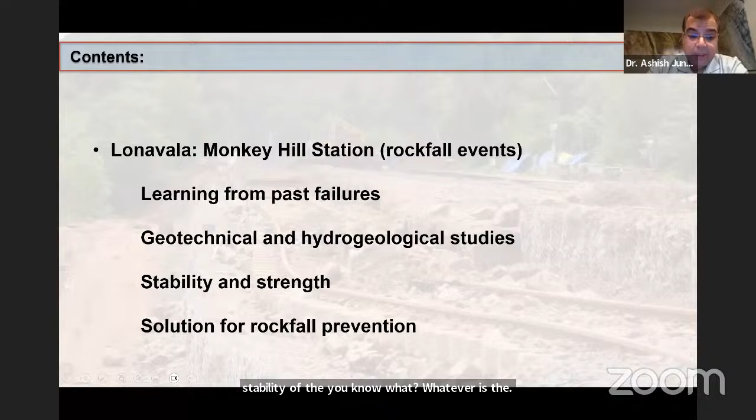And in fact, the best part is the solution was time tested a year after the installation, and this entire package was really, I would say, an eye opener for us. And thanks to Maccaferri, because they were the partners involved in the execution of the project. So I'll give you a brief background on this entire Lonavala section.

So it starts from Karjat. Karjat is a station not far from Mumbai. In the Karjat Lonavala section, this hilly terrain has, let me see if I can get a pointer. Yeah, I think this is better. It has several tunnels. In the entire 28 kilometers, you have 27 tunnels. So it's really a geotechnical challenge, this entire terrain of the Sahyadri range. The heights of these hills go right up to 600 meters.

One side of the section has steep cliffs and gorges on the other side. So it's really, as I said, a geotechnical challenge to have the entire railway line run through this terrain. This region receives 3,000 millimeters plus of rainfall each year. This is a large quantity compared to the short duration of monsoon months in the year. Just 3 months of monsoon and you have 3,000 millimeters of rainfall.

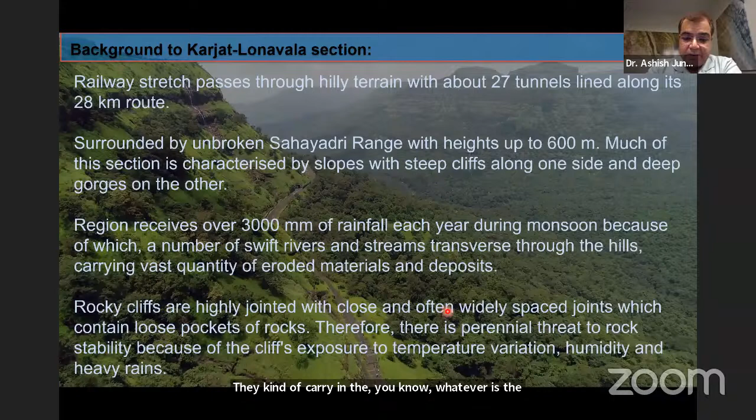It's a big chunk, because of which you have streams, rivers, and a large quantity of eroded material and deposits which pass through it. So a huge amount of erosion occurs. And these erosions carry away whatever is the jointed material between the rock cliffs, remove it, and degrade it. Because these joints are widely spaced and have loose pockets of rock, there is a perennial threat to rock stability when the cliffs get exposed to the wide variation in temperature, humidity, and rainfall.

So there is an extensive database maintained by the Central Railways from 2006 to 2017. As a first instance, all these rockfall events have been labeled or tabulated along this stretch. It's just about a kilometer plus long stretch, and we made it more like a pilot study. What you see over here, that's the hill. We call it Monkey Hill.

It's a Google map, so probably not so clear at this scale, but the station is somewhere there where you see the pointer. So you have these tracks coming from Karjat, Mumbai, and somewhere here the downline goes along this stretch, comes over here, and the upline comes along the other side and goes there. So that's the thing.

I'll run a short few second animation. It'll show you colored dots along this stretch. The size of the dots mimics the size of the landslide or rockfall event. Incidentally, landslide has a slightly different symbol, but let me see if you can catch these symbols as I run this video for the next 10 or 15 seconds. It has eerie music, just to show how dangerous this entire situation is. It starts from 2006 and goes each year. These events are larger each year. I think that's it, too short.

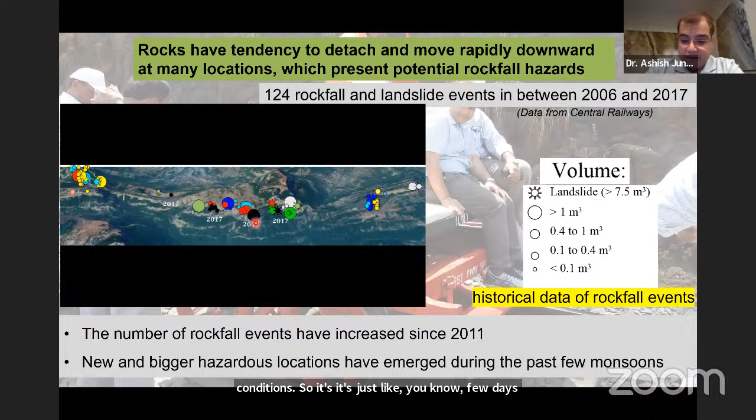But nonetheless, what you see is the number of rockfall events has increased. That's for sure, because people always worry about how extreme weather conditions cause this. Just a few days in a year is good enough to cause substantial damage. And it's also noticed that new and bigger hazardous locations have emerged in these past few monsoons.

And as an eye opener, in 2017, it was big news that boulders crashed through the engine of the Mumbai Hyderabad Express and pushed the train off the track. I think 3 bogies were off the track. The same year in August, a boulder punched through the Hubli LTT Express. Fortunately, in both these incidents, there was no casualty. But just a year later, again, boulders fell down on the tracks.

It's huge. These incidents made the railways take serious note, and they needed a more permanent solution rather than the routine examination they were having, wherein a person walks down the track every morning, sees if there's been any incident over the night, and reports to the nearest station. Something better was needed than a person each day reporting what is happening. That was the main objective, the main cause for the start of this entire exercise.

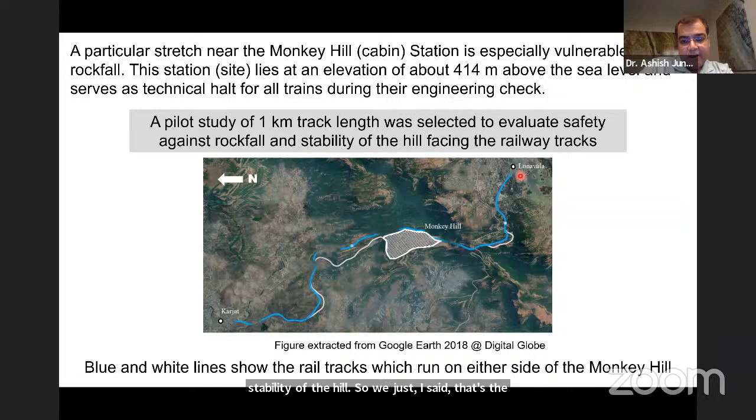So that's the line which goes right from Karjat towards Lonavala, and the white color is something which comes back.

They appear as individual spots. And at several locations you can find weathered and disintegrated basalt rock, which is mostly exposed, and it's the exposure over the decades which has caused this rock to disintegrate and weaken.

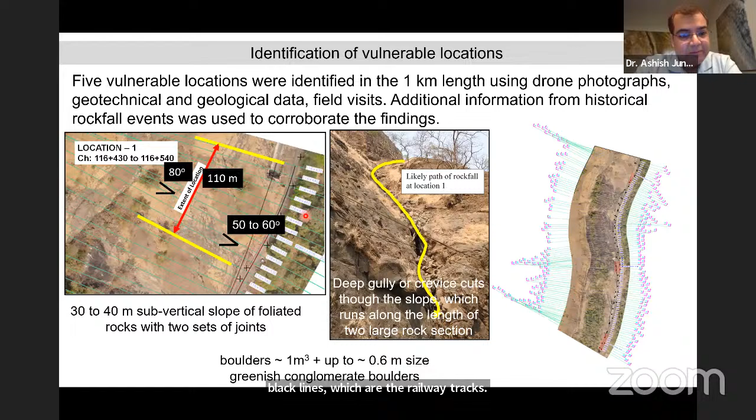I can go on, because this is location 4. Incidentally, location 4 is where the 2017 train accident happened, the Hubli LTT Express.

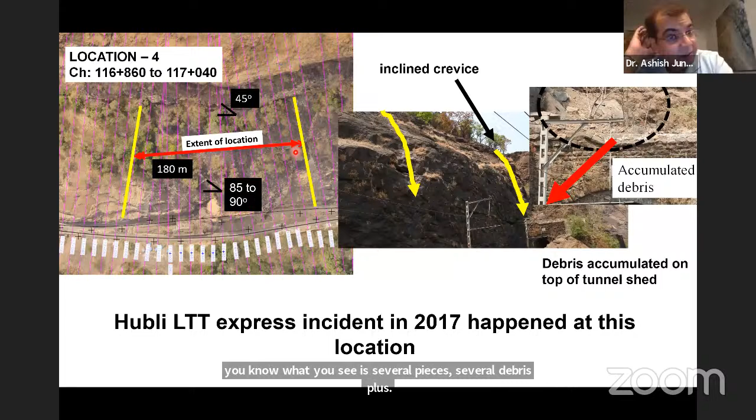I'll skip this, go to the next one. So with all these mitigation systems which are seen, it was more important to see which is the most effective mitigation method. We try to group them into 3.

The first one is prevention. Prevention is simple scaling, trimming of the weak pieces, remove them, and if necessary you do some shot blast of shotcrete, which can be supported by rock anchors.

The second one is a retention method. In retention method, you use mesh and netting, and support them with anchors. The third one is you protect your valuable infrastructure, or protect the system, using ditches, sheds, or even flexible barriers.

So what we needed for this site was a combination of two or more methods, and to see which combination really is more suitable.

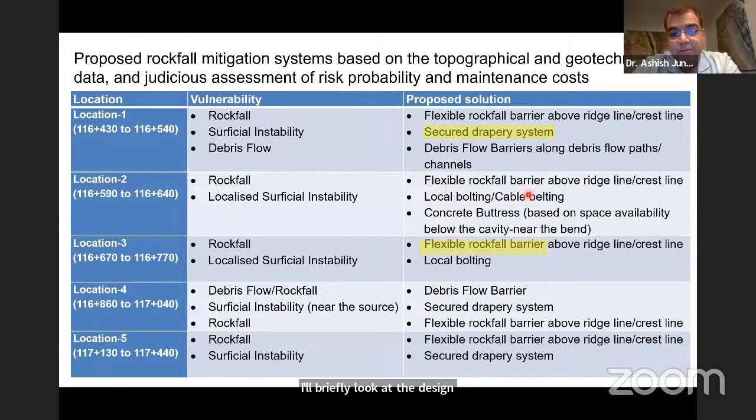There are other methods that were explored, especially gabion walls and concrete. Concrete was discarded because of its damage history, and gabion walls were not considered because of the large space required. So earth embankment and gabions were discounted.

There's another method where you use shotcrete. The examples we saw showed most of the shotcrete did not have enough reinforcement, but it's well documented - at least most of the literature, site visits, and experience we've seen shows shotcrete works poorly when exposed to weather along our Maharashtrian region, west coast. So durability is an issue, and you can see separation of shotcrete from the wall or rock face you want to protect.

So the idea of protecting the face against extreme weather dies off if such a separation starts. So we needed something where the maintenance is minimum.

So the draped or mesh system has a design. I won't go through the design details in this slide because I don't want to lose the audience's interest, but I'll highlight some important inputs necessary for the design. I'll just go to the next slide which shows the input.

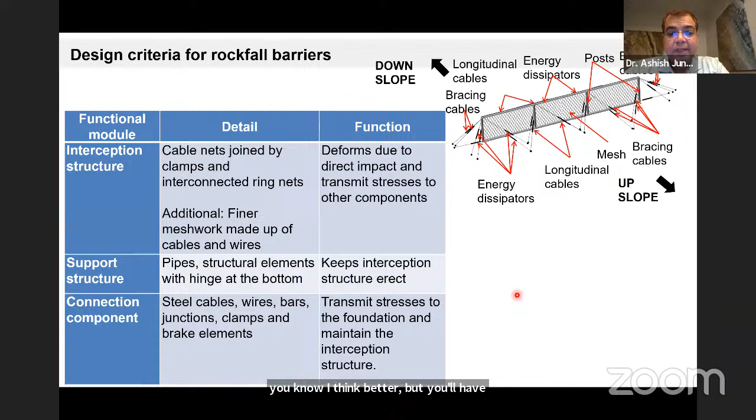Why is it better? Because it's based on a well-established, internationally recognized European standard, ETAG 27, its design specification, which is based on a lot of experimental data and back analysis. It's a well-established system, I would say. Most of the design is carried out either against the serviceability load or the ultimate load.

If you design against the ultimate load, after maybe a few crashes, you need a complete replacement of your barrier system. Serviceability would mean the safety factor against the impact load is 3 or 4 times the energy really demanded by the falling rock debris.

And these barriers range right up to 8,000 kilojoules. Let me tell you, 8,000 kilojoules is a massive, huge number. Even a few thousand kilojoules will dwarf you if you're standing next to it.

We also wanted the barrier system, because of its flexibility, to elongate when debris falls on it - it's designed to elongate so that the energy gets dissipated. And post-elongation, there should be substantial distance or gap between the railway and the barrier.

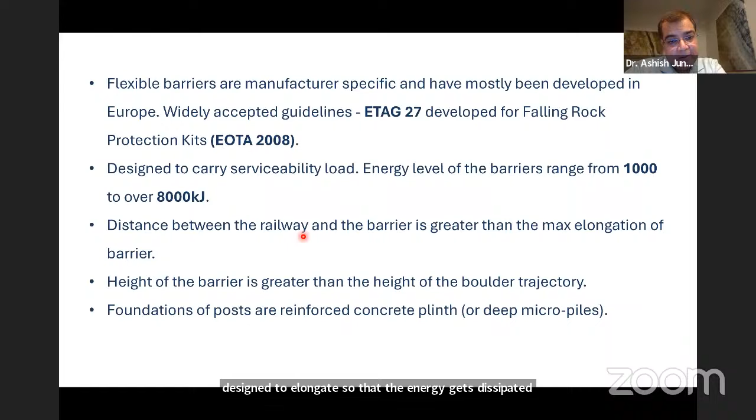Its design is quite simple, I'd say school level physics, where you have the total kinetic energy of the falling block due to linear velocity and angular velocity. You want to design this system so that the entire energy gets transmitted to the foundation and is dissipated in the ground.

There's a very nice computer program - I really appreciate it, though it's a commercial program. We've tried it against a standard DEM model where you allow a block to fall, but I think nothing compares to it. I really appreciate the team behind developing it.

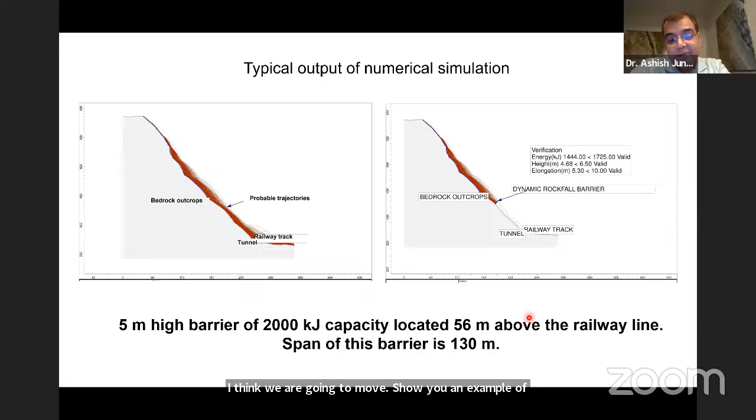So just one particular case, because I think we are going to show you an example of this 2000 kilojoule capacity. That's for one particular span or design. It was done, and it was very much in the news after that. Although it was tested, the engineers who made a lot of effort in getting this thing done needed a proof, I would say, with the limited budget given at that time.

So a small, I would say, pilot of the pilot study was funded, of about 6 crore rupees, to fund one particular section. And when you go back and see that out of those 5 sections, choosing the one extreme one and putting all your gamble money on that was really a challenge. And we also had experts going in.

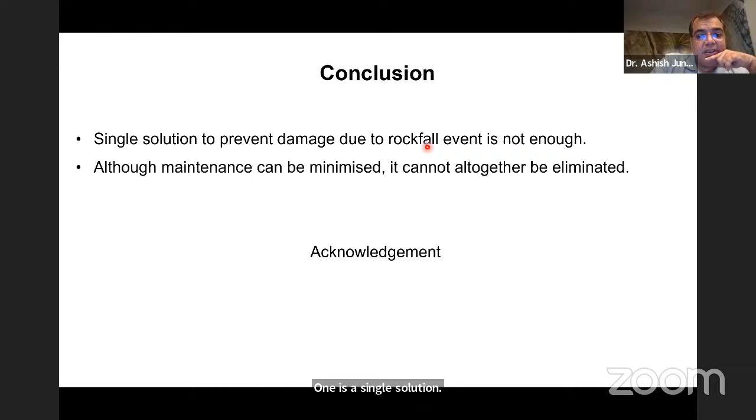So I'll just conclude with two statements. One, a single solution may not be sufficient to prevent the debris from damaging your infrastructure. And maintenance can be minimized, but it cannot be altogether eliminated.

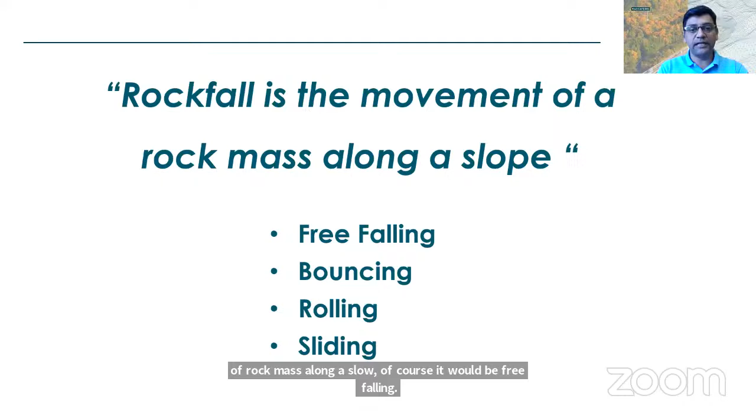Of course, first, what's this rockfall? Rockfall is a movement of rock mass along a slope. Of course, it could be free falling, bouncing, rolling, or sliding. I want to just show you some videos from YouTube which I collected so that you get a feel of a rockfall while watching this webinar.

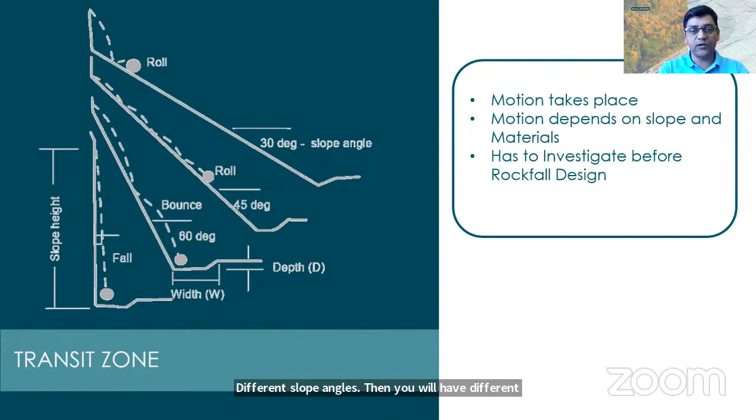And usually the detachment, when it happens, let's say from a vertical cliff, is going to be a simple free fall. But if it is on different slope angles, then you will have different motions, which could be a rolling motion, sliding motion, or bouncing. Of course, the animations I'm showing are exaggerations, but typically these are the motions.

Of course, why we need to understand this is in order to intercept these falling rocks, you will need to understand the mechanism, how it happens, and what the different possibilities are. At the bottom of the hill, you will have an area, the runout zone, where a large volume of rocks can be accumulated.

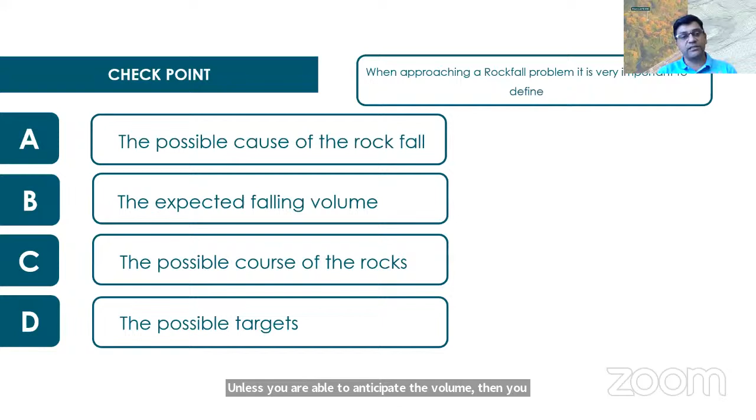Usually, when we approach rockfall mitigation or protection, we'll need to understand what the possible cause is, then what the volume is, because unless you are able to anticipate the volume, you will not be able to design the solution. Of course, it is going to be a probabilistic analysis where you are going to estimate and then design for it.

What's the possible course of the rocks coming from the hill, and which are your targets, whether, like Professor presented, it is a railway track, a road, a hydropower project, or a building. Depending on the type of target and the kind of risks we are anticipating, the solution will be chosen accordingly. Of course, there are various kinds of solutions.

This is a big list, but let's say you have protection measures, retention measures, and prevention measures, and I will take you through these measures one by one. One of the simplest and safest options, the first, is scaling, where you can just remove the boulders or debris and make the slope free of possible rockfalls.

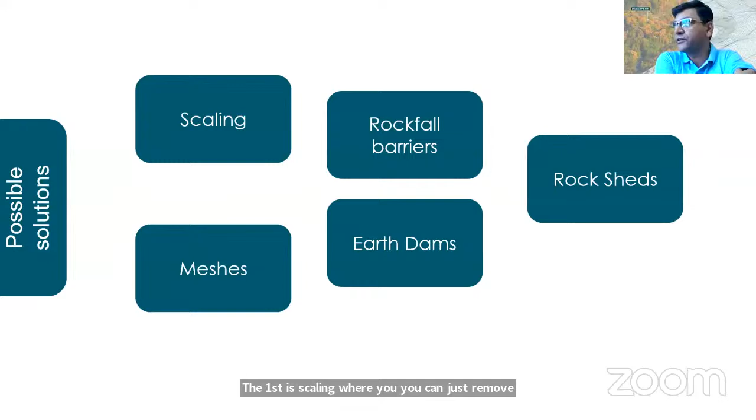However, there is a limitation to it. What's the volume of these loose rocks available, what's the height, whether you are able to reach it, and what property or infrastructure is at the toe of the hill, whether we will be able to hold this loose scaling. The most simple one is berms and benching.

So you can have, let's say, a slope and you can create benches. It's a very popular technique which is being adopted. Here you will need a lot of space, because if you have space, then you can have these berms or benching. What exactly will happen is, with these benches, the amount of energy the rock brings along with it will be reduced.

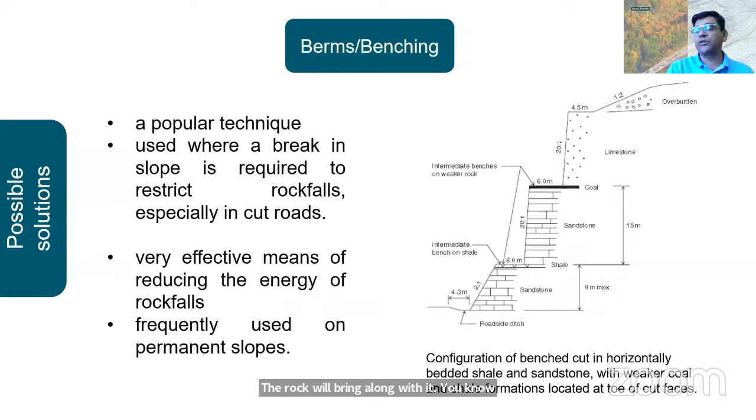And of course, the protection you are going to provide can be accordingly designed. Very simple: higher the energy, higher the cost of the solution. The most commonly adopted solution is the earth embankment, a very cheap one. However, the limitation is the space, like Professor mentioned. In the previous case, the earthen embankments were ruled out because there was no space available.

But if you have space available, then you can definitely go for solutions like the earthen embankments, which can be built with simple earth or maybe a reinforced soil solution. So, like reinforced soil or retaining walls, or let's say the embankment. You can have rigid solutions also, like the concrete barriers the professor presented as examples adopted in the central railway area, where you have seen the kind of damage it can make.

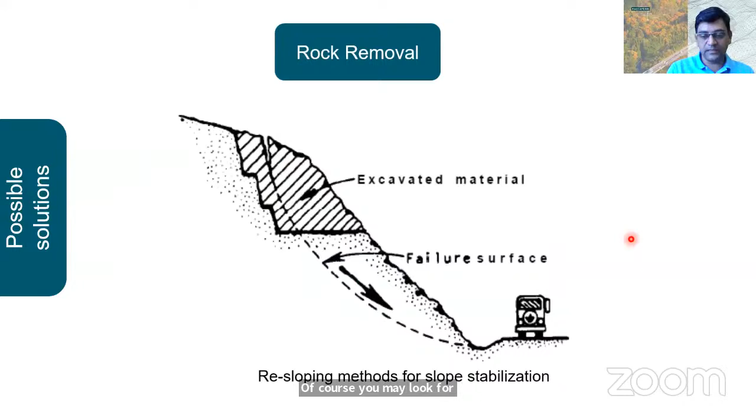You can have masonry walls or timber soldier pile walls. Of course, you may look for reprofiling or resloping if you have possibilities of flattening the slopes. Loose scaling, of course: you have the infrastructure to be protected and there are loose rocks, so maybe stopping the traffic if it is a railway or road, or providing a temporary protection measure, and intentionally bringing the loose rocks or debris down, which shall not cause the rockfall later on, an intentional rockfall.

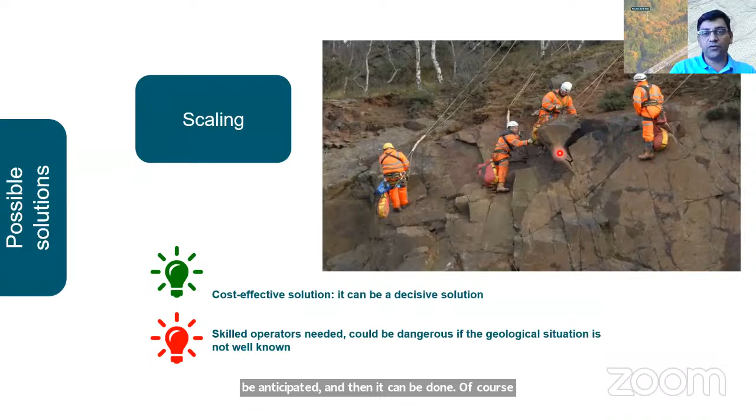Of course, this is a very cost-effective solution for immediate threats to be removed. However, this is not a guarantee that the rockfall will not happen. So we will need some protection measures, but this is one step. Here, of course, it could be a dangerous situation if the geology or the site is not properly studied.

The second solution is meshes, typically steel wire meshes. The steel wire meshes will prevent the rocks from coming down, or they can be contained in a certain area. Of course, in this case, the area to be covered by meshes will govern the cost of it. If it's a very big area, it will be a very high cost. And looking at the site locations, accordingly, the solution can be chosen.

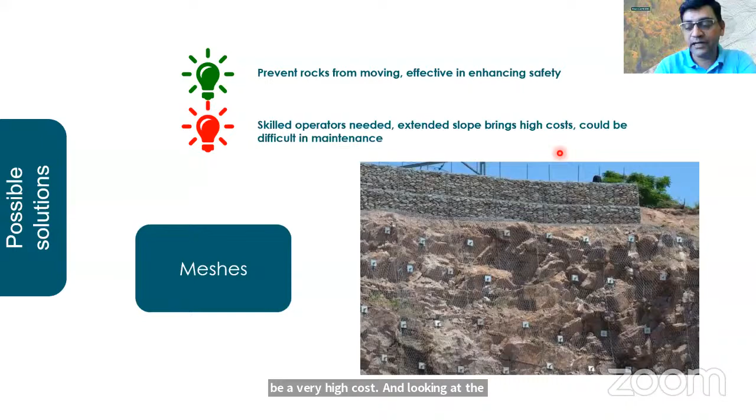Another solution is rockfall barriers, sometimes referred to as dynamic rockfall barriers, which can be installed on a slope. They are relatively easy to install, and could even be economical solutions in case the surface area to be protected with meshes would be higher.

However, please keep in mind, any rockfall solution is not going to be maintenance free. This is very important. Many times as civil engineers, we design certain structures which are maintenance free. However, rockfall solutions require routine maintenance, which will depend on the kind of material that is coming down.

Of course, the limitation with these barriers could be the energy levels. If the energies are higher than the available rockfall barriers can take, then you will have to go for a different solution. For very high energies, you can go for the earthen embankments, either a conventional simple earth embankment or a reinforced soil structure. The advantage is it can take very high energies. The disadvantage is it requires a lot of space, but this is a very, very cost-effective solution.

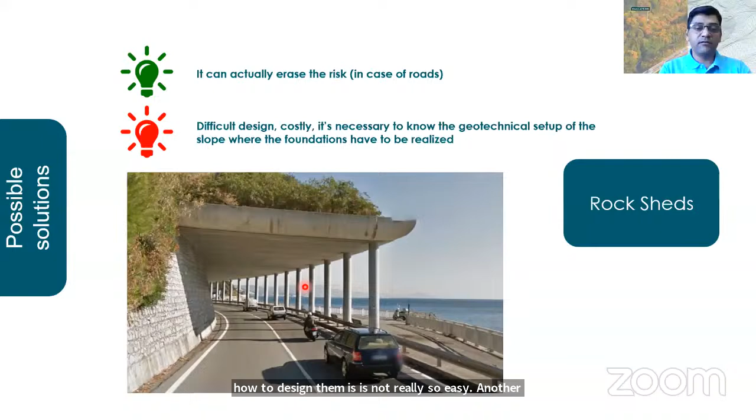How to design them is not really so easy. Another challenge is if it is going to be constructed in hilly areas. Of course, the placement of the foundation of such a structure is going to be a challenging one. If such a situation is there, then you will require a very, very huge cost to build this kind of rigid structure.

Or you can build a ditch or trench in case you have space. You construct a big trench where the accumulated debris can be collected. Again, this is a very good solution, however, subject to space availability.

Sometimes you may use shotcrete, like you place a mesh on the rock slope and put shotcrete. However, one of the limitations of shotcrete, like the Professor presented in the case, is that the mesh gets separated from the rock. Sometimes in these hills you have a lot of subsurface flow, and with this shotcrete you just stop the complete movement of the subsurface flow, which leads to pore water pressure generation and possible failures.

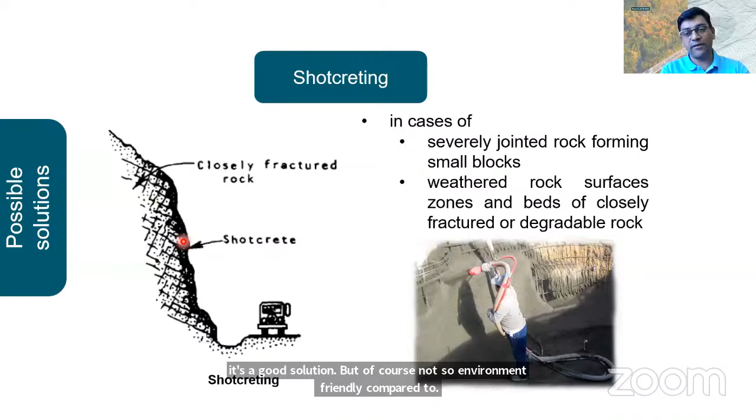Of course, it's a good solution, but not so environment friendly if we want to compare, let's say, carbon footprint. However, this is one of the good solutions to be adopted with certain cautions.

A very important part is drainage. Many a time it has been observed that rockfalls are noticed in the monsoon areas. That's related to very highly fractured, jointed rocks, from where the water seeps in. You have very fine material accumulated there because of weathering, and it creates a nice smooth surface where the rocks can just slip on, and then you have the possibility of rockfall.

So drainage is very important, which can typically be built by drilling holes, and through those holes you can put perforated pipes. And many times I get a question, are you really sure it's going to work? Just to show you, this is one of the projects on the Mumbai-Pune Expressway near Adoshi Tunnel. These are the pipes drilled in the hill, and you can see the amount of water it drains off during the monsoons, and around the year a lot of water comes from there.

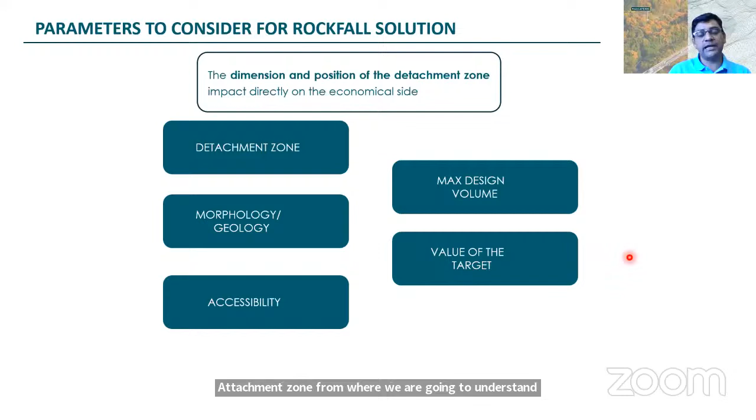Of course, when we design the rockfall solution, we need to understand the detachment zone, what the dimension and position of this detachment zone is. This directly impacts the economy of the solution. Second is the morphology and geology, how it's going to influence, and basically the type of work we want to use will be governed by this.

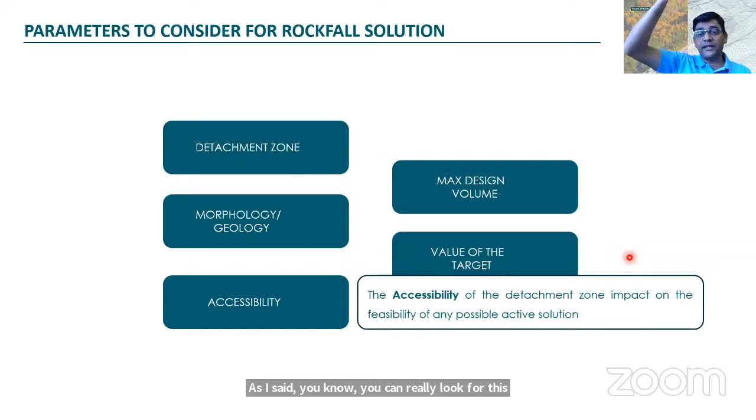A very, very important part is accessibility. As I said, you can look for the scaling operation, but if the hills are very high, like typically in the Himalayas, or even other areas where you have inaccessible tops, then you cannot do anything. If that's the case, then you will have to see the feasibility of any solution to be provided there to hold the rocks.

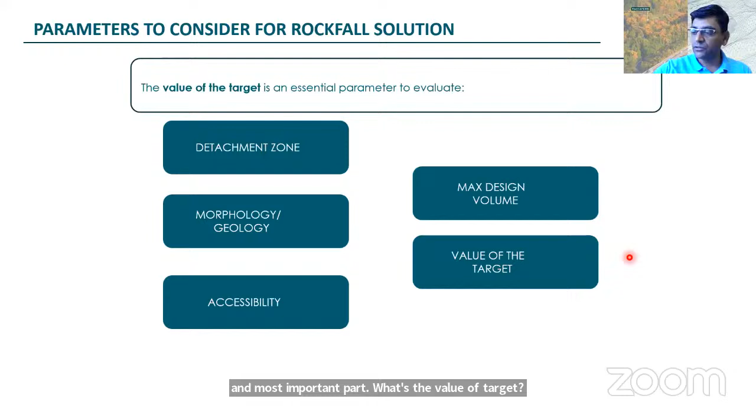The volume, as I said, will govern the kind of solution you want to choose, whether embankments, barriers, or meshes. And of course, the economy also will be governed by that. And most important, what's the value of the target you want to protect. Accordingly, you will have to take care of the solution.

Now, when we look at these rockfall protection works, the simplest one is you put a mesh. The mesh could be simple double twisted mesh or double twisted mesh reinforced with steel wire ropes, depending on the situation. But the most preferred one is the double twisted wire mesh, that is the hexagonal wire mesh with the wire ropes.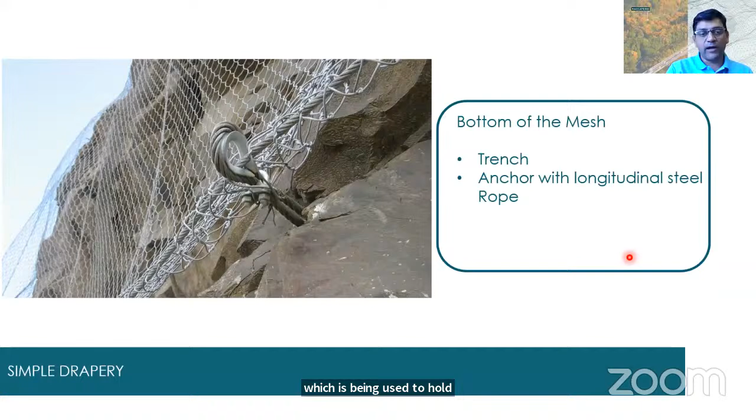What you need to understand is we are going to put a mesh facing with the longitudinal ropes on the top, and the mesh will be anchored at the top so that the rocks come down, and then at the bottom of the hill you can have a trench, or steel wire ropes used to hold anchors, and an additional wire rope at the bottom which can help to accumulate the debris.

Let's look at an animation. Of course, this is an exaggeration. The mesh cannot be just in air; what you see in the sketch, it will actually be hugging the surface. But just to give an idea, if you have a rock slope with the mesh and you have a detachment, it will come down with the mesh.

The falling rocks will be guided at the toe, either with the trench at the toe or with an anchor at the toe, and you will have accumulation of the debris. So accordingly, the debris system is to be designed, which will be dependent on the volume of material to be retained at the bottom and the kind of mass it's going to be.

Another option, typically we refer to it as a secured drapery. Secured drapery is nothing but where you put a number of anchors, could be soil anchors or rock anchors. Here, of course, you have a mesh followed by a number of anchors all along the slope, and then of course the cables, nets, or ropes which are being placed.

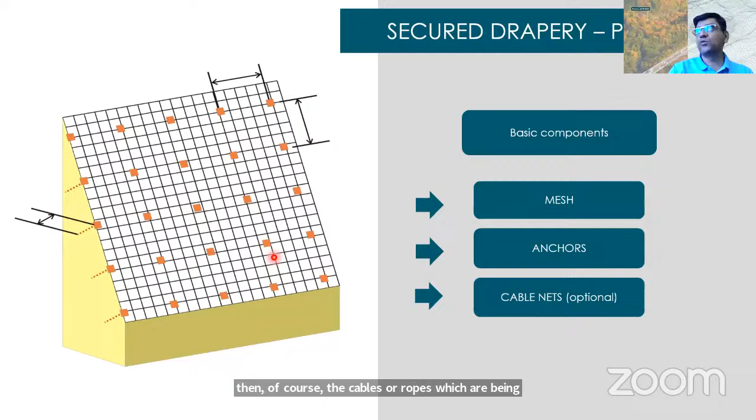So the idea is to possibly avoid the detachment of the rock mass from the slope, and the detached rock mass, if it is there, gets retained in the mesh itself. So the mesh will be designed for a volume of the expected or anticipated or assumed rock mass between the rock nails.

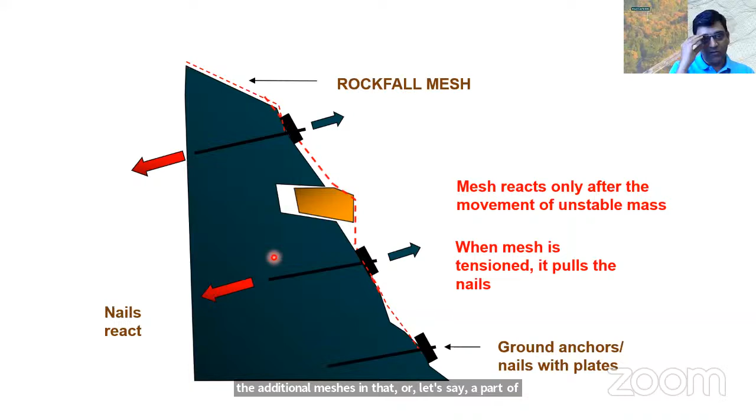Here you will have to understand the behavior of the mesh, how exactly the mesh will behave, especially when you have such situations of rock mass movement or accumulation of debris at top, so that you understand how much punch force, because it's a punching kind of force, it can take, and how much could be the deformation.

Obviously, when you have the drapery mesh installed on a slope, looking at simple drapery or secure drapery, you will need to understand the tensile strength of the mesh, which can be tested as per the various ISO norms. I don't have to go into the details of this, but that's how exactly you will characterize it.

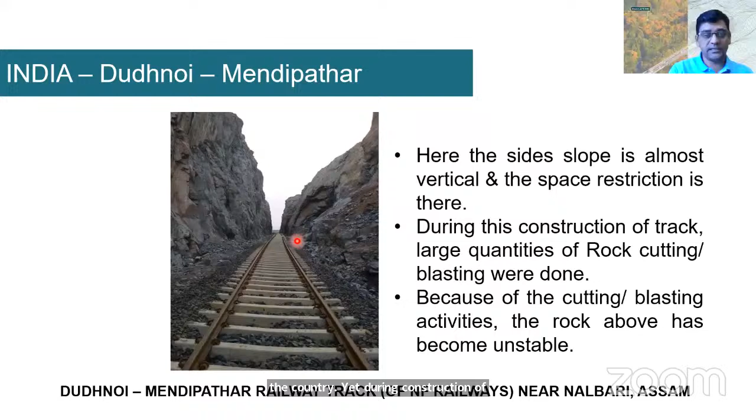Just to give an idea, let's say on one side we are looking at vertical cuts for a railway project. That's from the northeast part of the country. Here, during construction, large quantities of rock were cut where blasting was done. Of course, there is a lot of fragmented rock on the surface, which poses a threat to the safety of a running railway line. This is a railway station, and it's happening close by here.

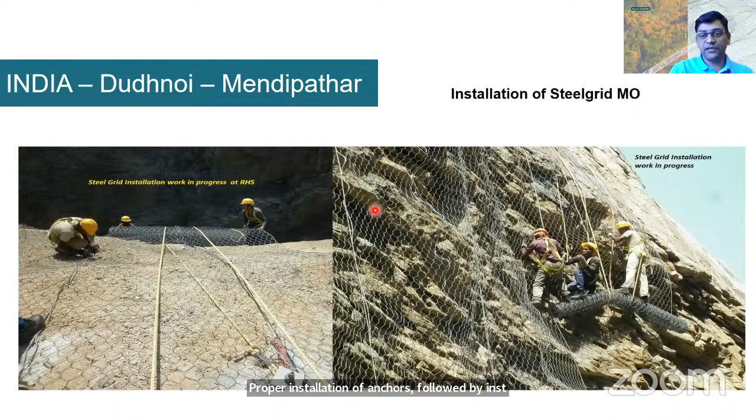So here the solution was placement of a mesh and the nails, what we just saw as a secure drapery system. Here the first step is you have the anchors at the top. The anchor design will be governed by the type of rock available there, and then you do the proper installation of anchors followed by installation of the drapery system. Of course, while doing so, proper care and safety has to be taken.

According to the rock size and estimated volume, you choose the different types of mesh. It can be a simple hexagonal wire mesh, or you can have steel wire rope panels, typically what we refer to as HEA panels, high energy absorption panels, or you may have steel wire mesh reinforced with the panels, which we call a MAC armor system.

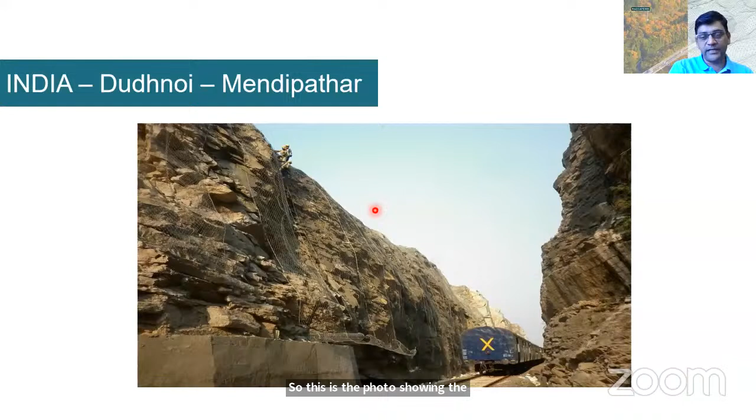So this is the photograph showing the construction of the protection while the railway line is operational. So these solutions are very, very flexible, not just from the deformation point of view, but even from the installation point of view. Depending on the project requirement, you can continue the operations also. So this is the high energy absorption panels.

Another solution is typically barriers. The function of a barrier is to stop the motion of the boulder, catch it. Sometimes it is referred to as a catch fence. Some people refer to it as a dynamic rockfall barrier, where you anticipate an infrastructure, could be a railway, a house, or a road, and a falling rock coming from the slope which could hit the infrastructure and cause damage.

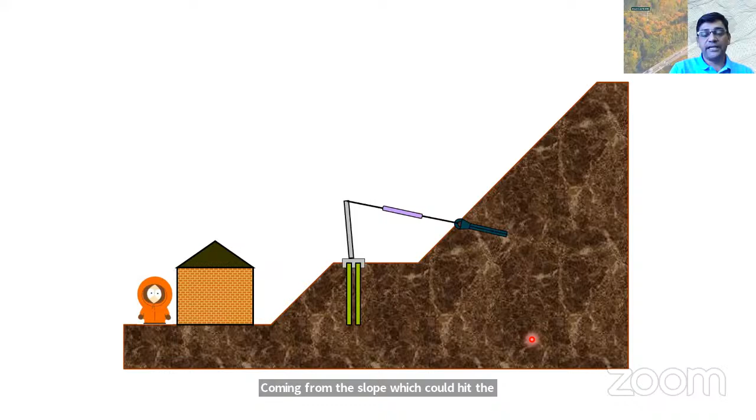So you install the barrier with, first of course, the foundation, followed by the posts, upslope anchors, and then the interception mesh. And if there is a rockfall, then the falling rock is caught by the barrier.

Usually, when you design these rockfall barriers, you need to take care of energy, but a very important part is also the amount of deformation you expect and how far the infrastructure is from there. If it is very close, let's say you have a road or railway very close here, you will have to minimize the deformations. So the design of the barrier will require information on the deformation of the barrier. And as the Professor mentioned in the previous presentation, these barriers are tested as per certain guidelines, the European guidelines.

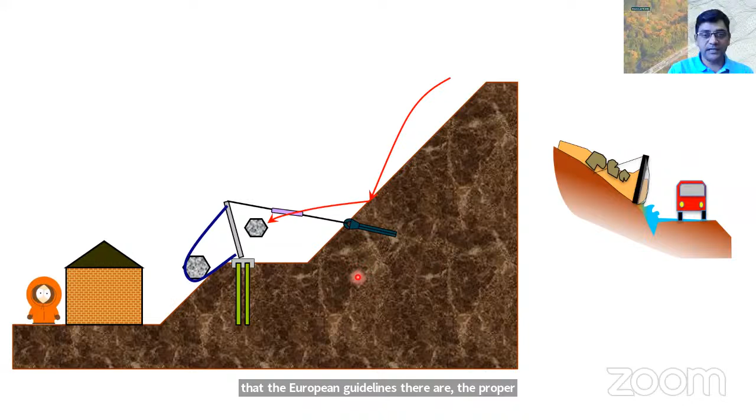There are proper tests to be carried out, where this whole system is referred to as one system: foundation, post, rope, upslope rope, the brakes, and the mesh. That's what is typically referred to as the EAD, European Assessment Document, which gives the information of these barriers.

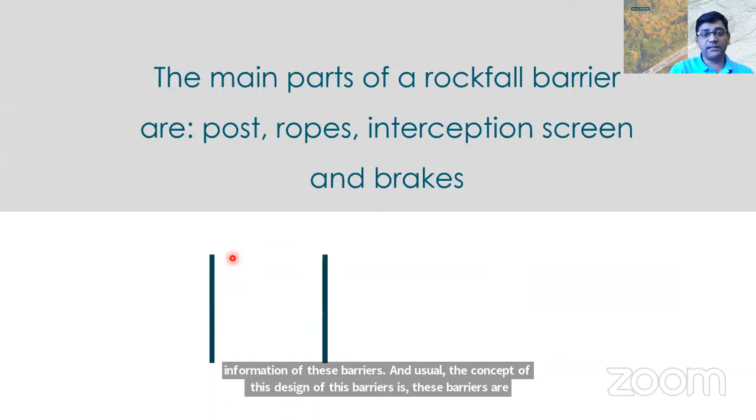Usually the concept of design of these barriers is that they are designed for multiple impacts. What are the main parts of these barriers? First, of course, nothing but the post. Posts are the vertical steel members which are installed, followed by the ropes, which are usually the side ropes, the top rope, upslope anchors, bottom ropes, and then the interception mesh, followed by the brakes. So this is a typical sketch.

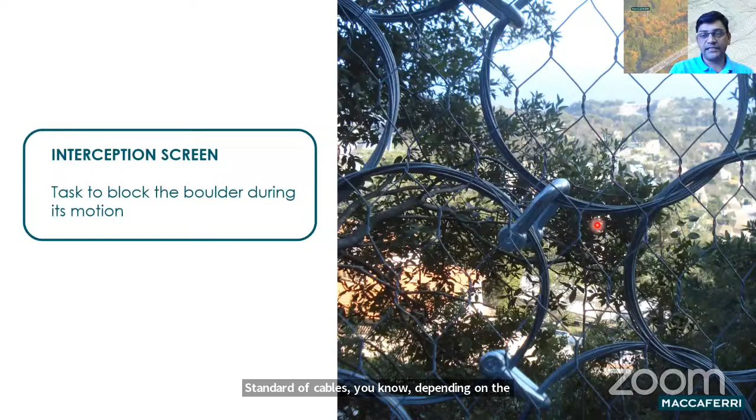There are possibilities of various types of interception mesh, like rings. You can have the double twisted hexagonal wire mesh, or you can have the steel rope cables. Depending on the energy, different types of screens or meshes are used. And then the brakes, like the omega shape brakes.

The title of this webinar is Advanced Flexible Solutions for Rockfall Protection Works. If you have very rigid barriers, they usually get damaged, they cannot absorb the energy. Whereas these are dynamic flexible barriers. The function of the brakes is basically to control the loads on the barrier as well as on the foundation, which optimizes the overall solution.

For designing this kind of barrier, you need to understand the kinetic energy, which is half m v squared - that's simple physics. When you design rockfall barriers, kinetic energy is the accepted approach for designing them. You will also have to design the barriers considering the deformations for the designated dissipation energy. The performance of the brakes is very, very important. Each and every element of the barrier performs a certain function, and the whole barrier needs to be considered as one package.

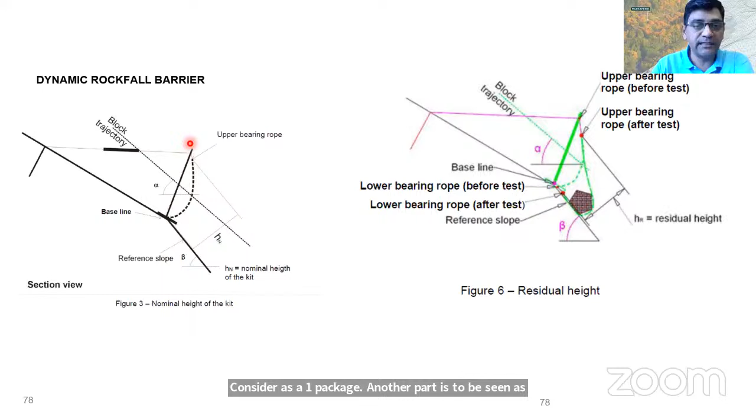Another part to be considered is the residual height. What it means is you design the barrier for a certain height, but after the first impact, there will be a reduction in the height of the barrier. The remaining height is referred to as the residual height. You take a ratio of this residual height to the original height, and based on that you classify the barrier into different classification classes, A, B, C.

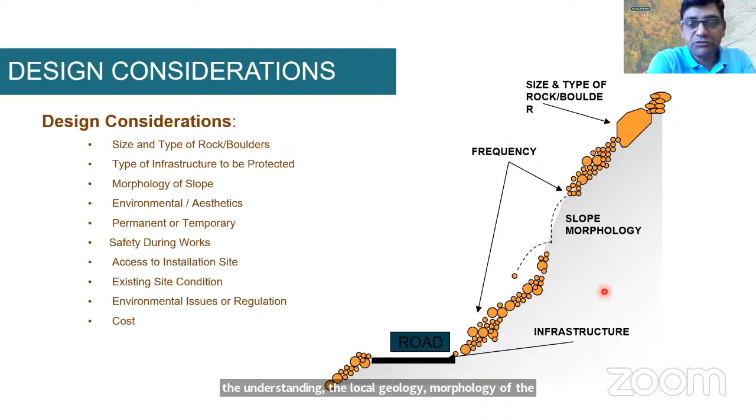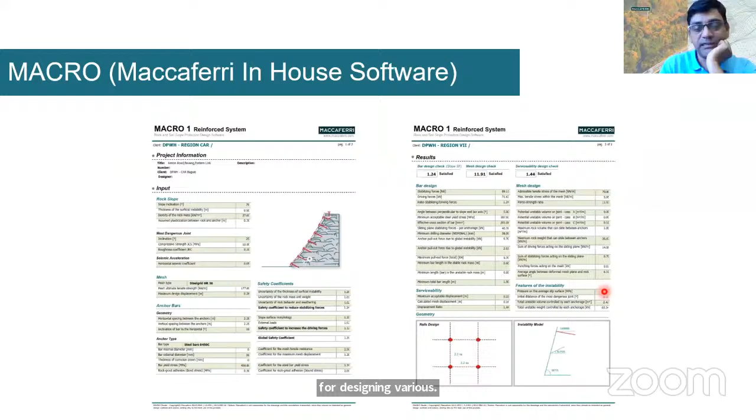For designing this kind of structure, you will need to design the anchors or nails. For that, you can use commercially available software like Slide. We also have our own software, Macro 1 and Macro 2, for designing various systems like simple drapery systems and secure drapery. For design of the rockfall barrier, you need a simulation of the rockfall, which is usually done by the Rocscience software, RocFall. With a combination of various software, you can design the overall solution.

Now, I would just quickly glance through some case histories so that you get a feel of whatever we have talked about.

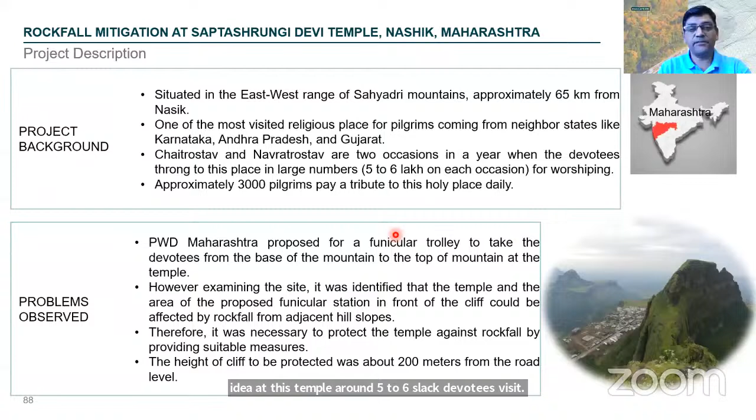The challenge was the extent of area to be protected was very big. The heights were very high, around 200 to 250 meters from the accessible location. During monsoon there are clouds, so visibility is a challenge. There were vertical cliffs, and the hill itself was inaccessible. So for the first time in India, helicopters were employed for transportation of material. The site was such that even regular civil construction workers could not work here, so specialized climbers were engaged.

The solution was a secure drapery system of high energy absorption panels made of steel wire ropes. A dynamic rockfall barrier of 5,000 kilojoule capacity was installed, around 7 meters high, protecting around 150 meters of length.

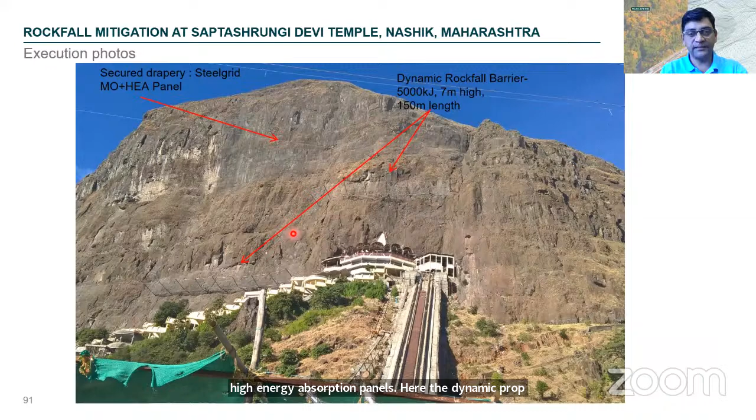The success part is that after installation of this solution in December 2015, a rockfall event was reported on the slope above the temple in June 2017, which is typically a monsoon month there. The dynamic rockfall barrier captured these rocks, which were weighing around 300 kg. When this event happened, there were devotees just below these barriers, and the rockfall barrier saved this precious human life. So that's the success of this rockfall solution implementation.

Another solution is from the Mumbai area, Gilbert Hill. Gilbert Hill is a very interesting site, unique in India, where columns of hexagonal cross section of basaltic lava are noticed, formed around 65 million years ago. This is a grade 2 type heritage structure declared by the Municipal Corporation of Greater Mumbai in 2007.

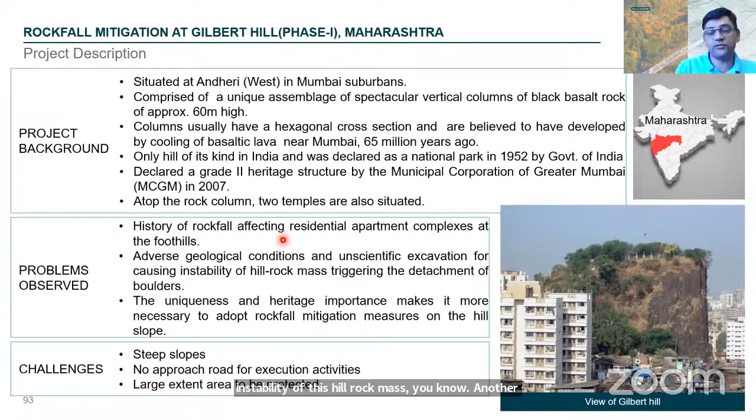This area had a history of rockfall, and there are residential complexes nearby. Because of adverse geological conditions, it was required to provide a solution. There were some unscientific excavations which led to instability of the hill rock mass. Another challenge was the steep slopes, no approach road to the execution activities, and large extents of area to be protected. Considering these space restrictions, a secured drapery system was installed with HEA panels and steel grid, along with subsurface drainage to avoid seepage issues that could lead to huge failures in future.

The next case history is from the Mumbai-Pune Expressway, Bhor Ghat section. This is part of the Western Ghats, Sahyadri Mountains. Here a tunnel is being built, and near the tunnel there have been incidences reported of rockfall and landslide, with possibilities of damage to infrastructure. So here the solution was provided with rockfall barriers of different capacities, like 2000 kilojoule to 5000 kilojoule.

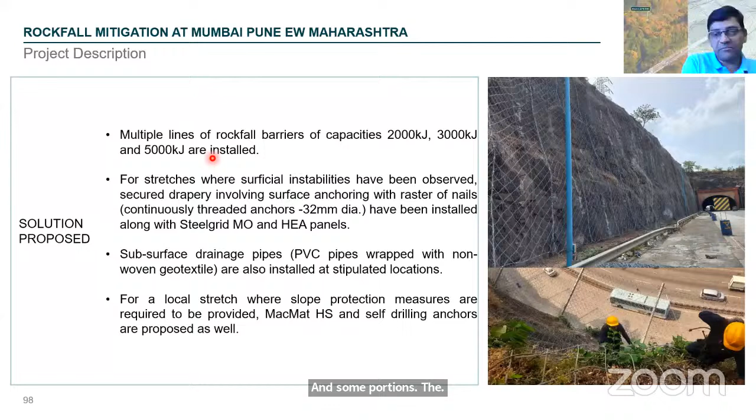Nails were installed of 32 mm diameter. Subsurface drainage, which is a very important part, was installed using PVC pipe wrapped in non-woven geotextile. In some portions where slope protection was required with vegetation, high strength mesh with synthetic mats were installed.

These are the execution photos of protection of the slope with barriers installed on top. This is another view, another location where the barriers are installed. So if you travel from Pune to Mumbai, you will notice this solution implemented.

Moving from Maharashtra to the Himalayas, this is a project from Uttarakhand, for a hydroelectric power station, Dhauliganga. Here the issue was basically fractured, weathered rock with vegetation on the slope.

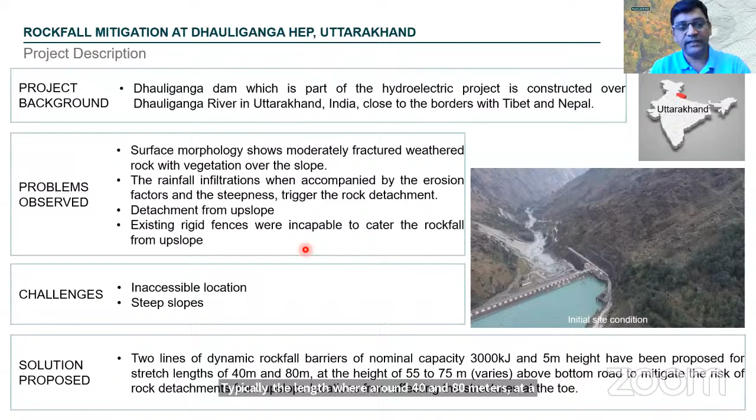Due to the possible accumulation of debris as well as the steepness, combined with rainfall, anticipated detachments of the rock mass in the uphill slope were anticipated. Here, as usual, inaccessible location was the challenge along with steep slope. So the solution was provided with dynamic rockfall barriers of 3000 kilojoule with 5-meter height. Typically, the lengths were around 40 and 80 meters at a height of 55 and 75 meters above the road level to mitigate the risk of rock detachment.

From the Himalayas coming to extreme south, this is Southwestern Railway in Tamil Nadu. Here, an incident was reported of a detachment of rock on the railway line, so it was required to install rockfall barriers - multiple lines of rockfall barriers of 1500 kilojoule. I will not go into design and too much detail of this. In view of the limited time, I will just present these case histories, and we can interact.

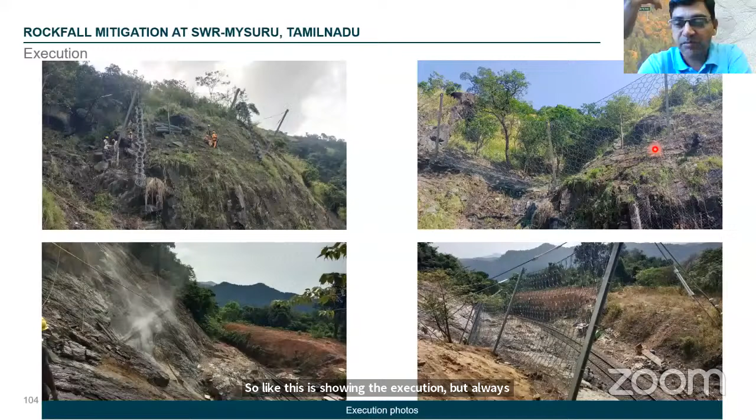You can get in touch for understanding more. But most important part is you can have various kinds of solutions like rockfall barriers, drapery meshes, embankments. This is showing the execution, but always rockfall protection works require specialized installation. That's why it makes it such special work.

Another example from Uttarakhand, this is at Lambagarh, a landslide area. Here, looking at the volume of material sliding down and the space available, a reinforced soil structure was used to build a rockfall embankment at the toe of the hill, where the Gabion fascia was used - this is a reinforced soil structure. Just to give an idea, this is a retaining wall of Terramesh being provided for road retention where space was available. This wall is approximately 10 meters high, and this one is around 40-plus meters high.

So here the rockfall embankment was provided with the stone fascia Terramesh system, so that any rocks and debris sliding down will be stopped by this rockfall embankment coming on the road, maintaining the safety of the road.

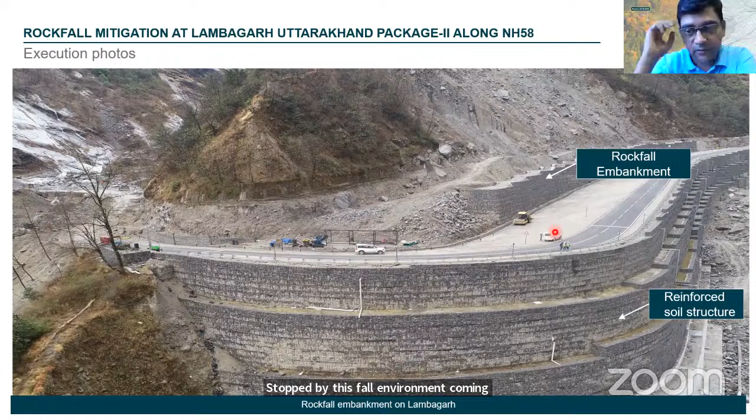There's another project from the Himalayas, but a different state, Himachal Pradesh. This is Pangi Nala, where problems were observed of detachment of debris from the slope. The hillside is around 1 kilometer, and the valley is around 60 meters deep with a steep slope angle of 60 to 80 degrees. Very, very challenging site, inaccessible location, no approach road at all. Here the solution provided was a rockfall dynamic barrier, because with such a high slope, you cannot have draperies installed.

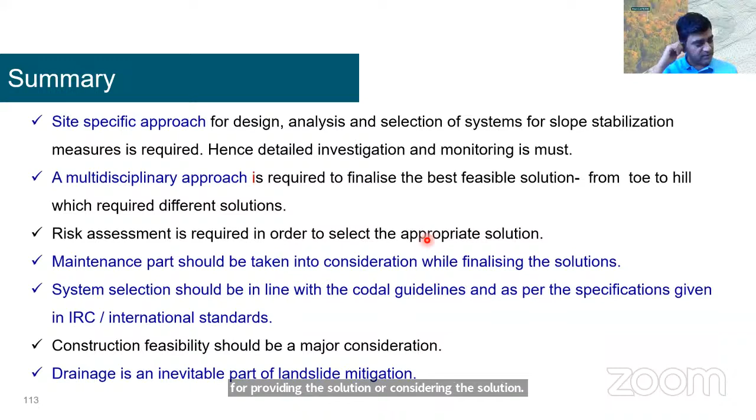Most important part, maintenance has to be considered for providing the solution or considering the solution. Of course, the codal guidelines, like Professor mentioned, IRC SR23, can be referred. Drainage is a very, very important and inevitable part, and I think must be considered as a part of any rockfall solution.

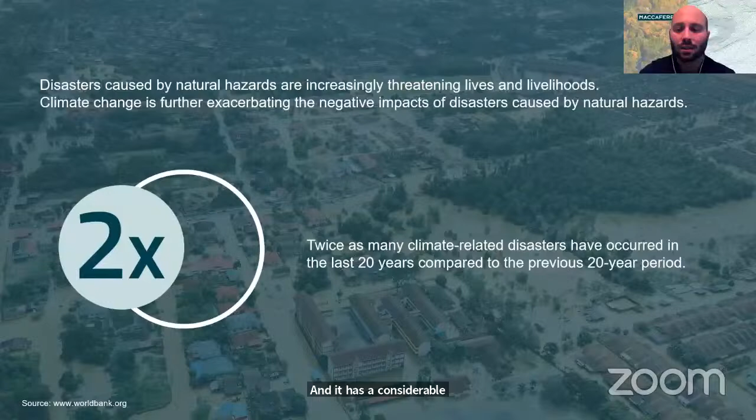And mitigation must be a priority. Actually, it's a priority for us as Maccaferri for reducing the risk for our communities. That is our everyday commitment. One of the solutions for mitigating the risk is investing in digitalization, which is also what the Secretary of the United Nations recently stated.

This, according to the United Nations Office for Disaster Risk Reduction, the UNDRR: early warnings given 24 hours in advance can reduce the resulting damage by 30%.

And by the way, for those not familiar, the definition of an early warning system, EWS, is a complete system that identifies potential threats and provides timely information to reduce the impact of these threats. This also includes monitoring, analysis, and communication of the risk to ensure proactive measures can be taken to protect assets and ensure safety.

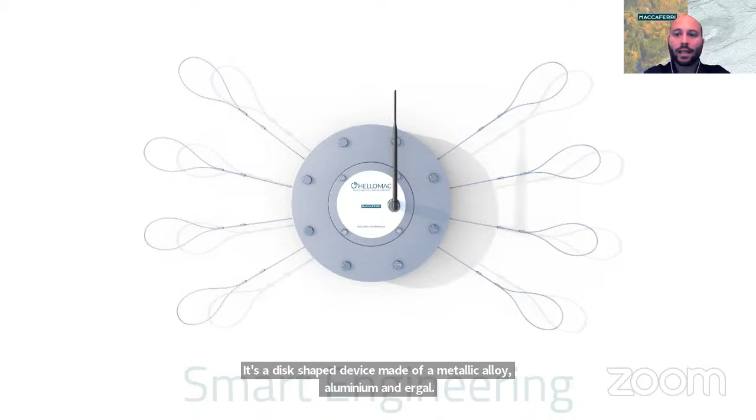First of all, as you can see from the picture, it's a disc-shaped device made of a metallic alloy, aluminum and ergal, for resisting impacts, because it will be installed, for example, on rockfall barriers. It's equipped with 8 tie rods that we call legs in jargon, for the connection of HelloMac to the solution, and one antenna for communicating the signals.

HelloMac is very small, approximately 30 centimeters by 60 centimeters, with a very limited weight, approximately 8 kilos. That means it is very easy for workers to handle and carry on site. Job sites for rockfall applications are typically located in remote areas, very difficult to access and reach. It's also extremely easy to install, and skilled workers are not required at all.

In fact, not even wiring operations are needed for the installation, because it is powered by standard batteries with a guaranteed lifespan of minimum 5 years. Maintenance is very small or not needed in those 5 years, unless there are impacts or problems with the protection installed. The alarm signal can be notified using either satellite or GSM 4G networks, ensuring full coverage all around the world. In remote areas where there is no signal at all, we can install HelloMac using satellite, the Iridium technology.

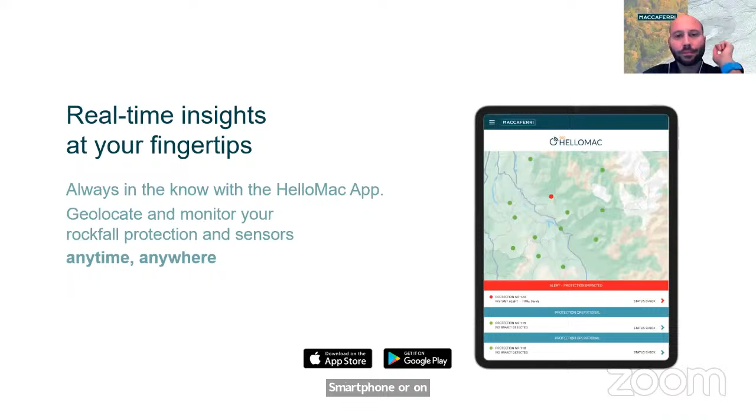The goal of this new technology, of the digitalization and then of HelloMac, is to make people and our communities safer, as I mentioned before, like we saw in the first couple of slides. And how could it be done? Installing HelloMac on different applications and solutions with a smartification of each of them. So let's go more into detail for each of these applications.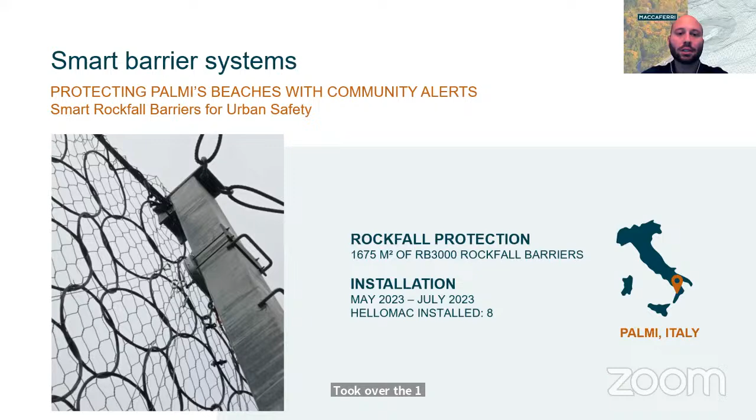Here we have a nice case history, an installation recently done on a barrier in Italy, on an RB3000, that is a 3000 kilojoule energy level barrier. We installed 8 HELLOMAC Geo, each of them directly on the post, as you can see on the slide here. I don't know if you can see my pointer. Each device is used to alert the span of each barrier to cover the 1,675 square meters of barrier.

And then HELLOMAC Geo can be installed on drapery systems such as simple draperies and secure draperies, as you can see in this render. Also in this case, the goal is the smartification of our drapery systems, meant to contain the material detaching from unstable slopes, as also mentioned by Dr. Ratnakar before. The goal of HELLOMAC Geo is to alert the drapery systems and make them smart, detecting movements and detachments all along the slopes covered by our netting systems.

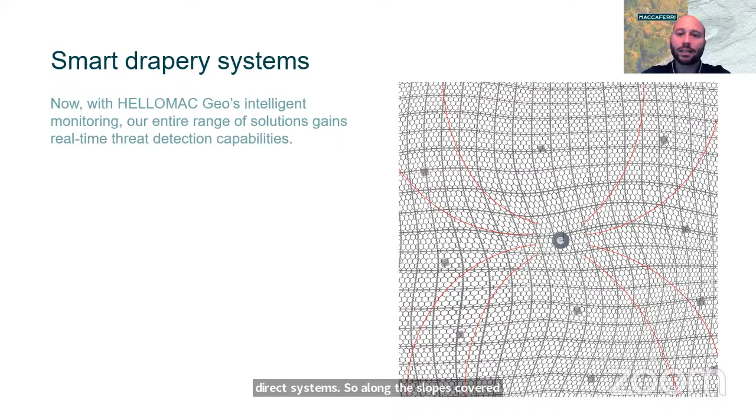Here we have an example of a recent installation on a secure drapery realized with HEA panels, Maccaferri's rope panels. This is another nice picture of this job, and the HELLOMAC Geo was installed on a specific area that needed to be alerted, on the specific rocks that are expected to move.

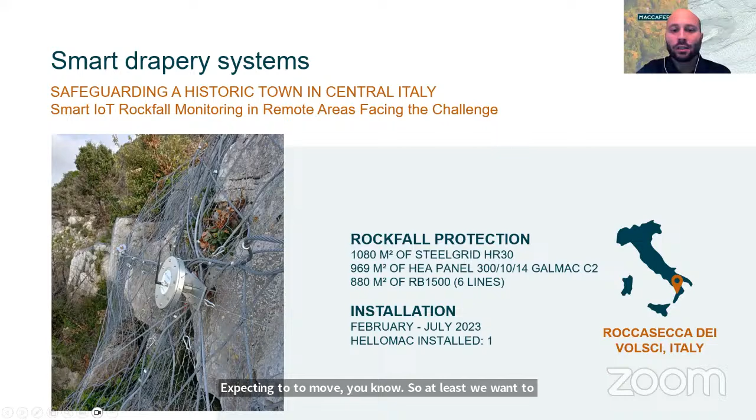HELLOMAC Geo can be installed also on existing barriers, not only on new systems, with a specific retrofitting. This means that we are able to adjust our HELLOMAC Geo to rockfall protection systems already existing, adapting them to the new requirements and standards, because this is most likely the goal in Europe in the future. They are already working on new guidelines and standards so that it will be required by law that all the systems be smart, with an IoT installed to have everything under control in real time.

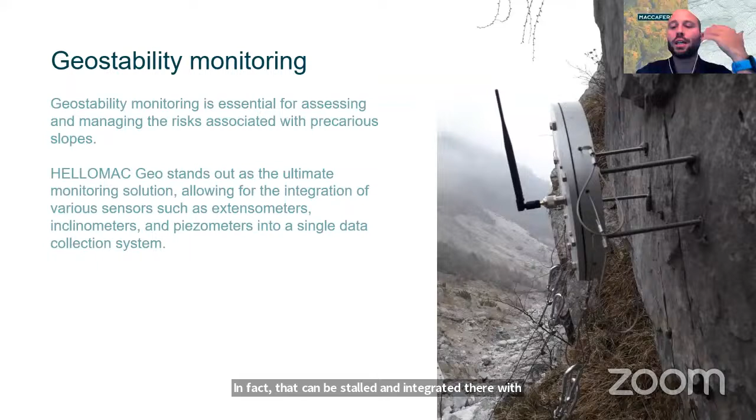Another possible application for HELLOMAC Geo can be, for example, slope stability monitoring. It means to install HELLOMAC Geo for assessing and managing the risks of unstable slopes. HELLOMAC Geo, in fact, can be installed and integrated with complementary components such as strain gauges, inclinometers, sirens, signals, and others.

And then I want to stress again our effort in innovating and improving our solutions. This effort didn't stop with HELLOMAC. We developed several additional kits with complementary components that can be integrated with HELLOMAC Geo for upgrading our system, making it plus. In this way, we will be able to have all the info and data needed in one single system. So in one app, in one hand, directly on your device: smartphone, tablet, etc.

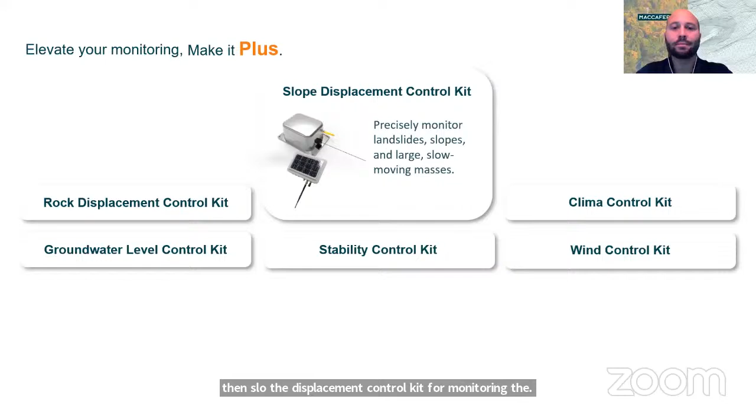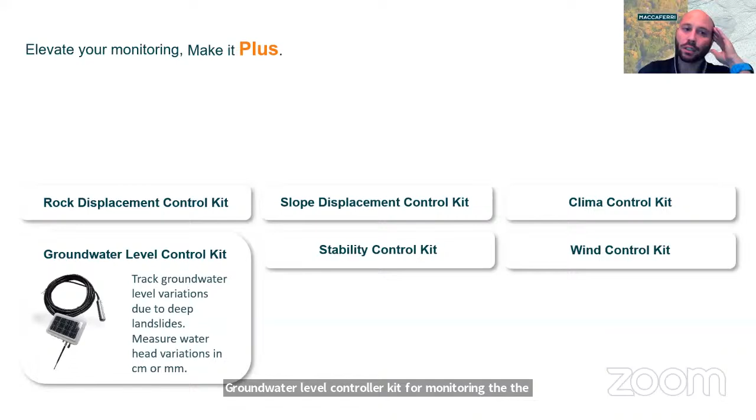Then clima control: this kit is meant to monitor the environmental conditions with components such as a rain gauge. Groundwater level control kit for monitoring the variations of water level. Then the stability control kit for monitoring the movements of slip surfaces, for example using an inclinometer. And then the wind control kit for detecting the wind conditions, intensity, direction, etc.

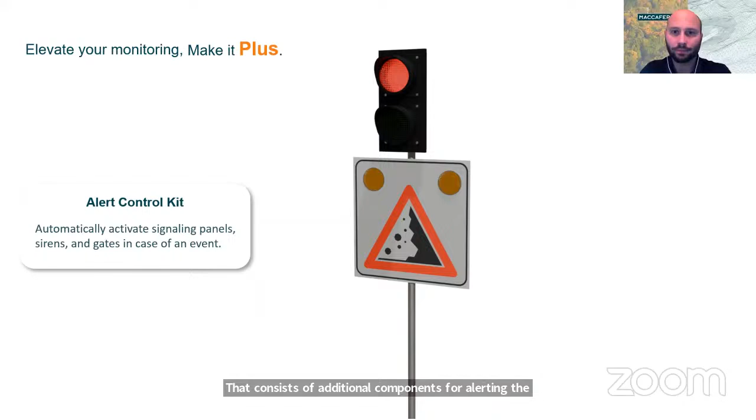And last but not least, the alert control kit, which consists of additional components for alerting and reporting the events directly on site, not only notified on the app. In parallel, of course, it's notified on the app, but with these additional components we are able to notify directly on site that the event is happening, with devices such as you can see in the slide: sirens, gates, signs, directly connected to the HELLOMAC.

In this way, you will have everything, monitoring and also alerting, everything I showed you till now, in one single system, avoiding additional costs, and everything wireless and live directly on your app, on your tablet, on your smartphone, on the browser if you have a laptop, and also on site, considering the additional components we saw before, the alert kit.

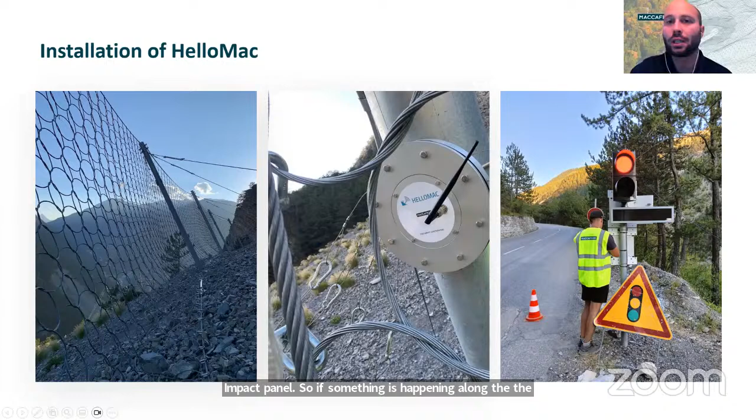So if an impact is happening, see the road connected to the impact panel. So if something is happening along the gully, the road is interrupted by the traffic light, and then also by the signal where it's explained that something is happening.

Here, a nice picture in Italy of HelloMac Geo installed on secure drapery, HEA panels, so our rope panels. So you can see now the cliff, how steep and dangerous it looks. And one HelloMac was installed there, so if movements are happening, the alert is sent. Actually, there is also, I think, an inclinometer installed here just to check the movements.

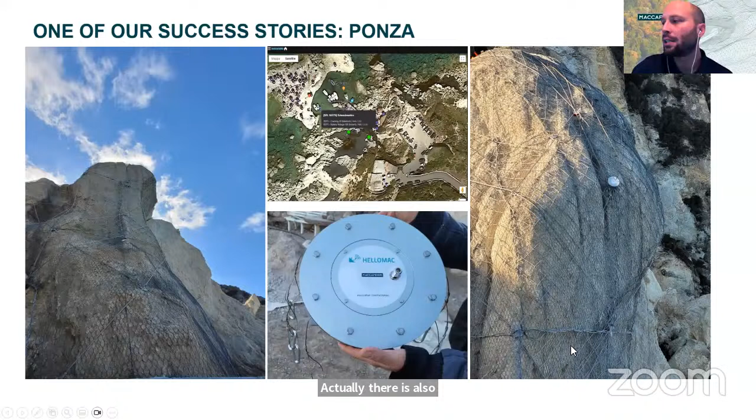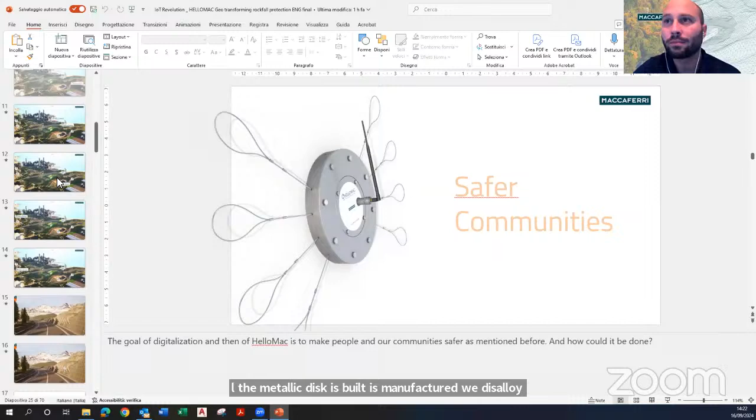Okay, thank you. We have another question for Mr. Luca Gobin: what is the primary purpose of using IoT in detecting rockfall and environmental hazards? So the idea is, as I said before, to have a prompt intervention during or after the event. Sometimes we don't have track of that until it's too late, and sometimes you need to close the roads immediately. This is the goal of early warning systems, to increase the level of protection to communities, because we know what is happening and if we need to make an intervention to alert.

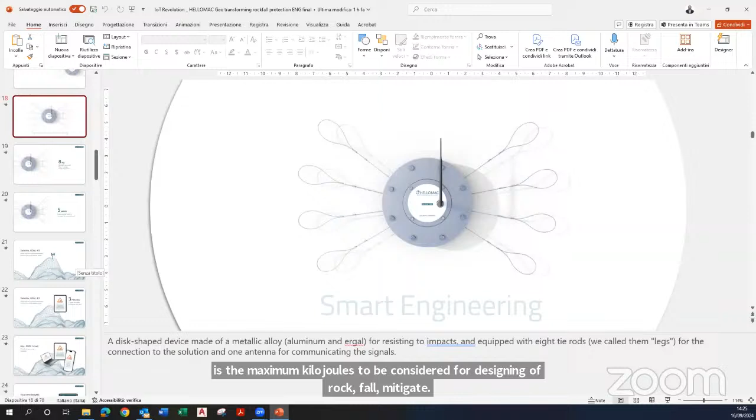Thank you for the question, it's a very common one. The amount of energy for any protection will be governed by the volume of the rock mass and the height from which it is getting detached and rolling down. So the range of solution will depend on the volume, or the amount of energy. Typically rockfall barriers can be used up to 10,000 kilojoules, though there are developments in progress for even higher capacities. When the energy crosses these numbers, you can go for embankments, reinforced soil embankments, back-to-back structures, or hybrid structures, which can take even higher energies.

Thank you, Dr. Ratnakar. Another question from Dr. Ratnakar: What is the life cycle of the flexible barrier and drapery systems? And second, is the design for the most probable event or a specific lower probability event?

This is again a very interesting question. Typically the life cycle of the barriers is governed by the impact, by when exactly you have an impact. If I've installed a barrier and it's not impacted for a number of years, that's not an issue. The barriers are designed for a certain energy. As Luca explained, there is SEL and MEL - SEL stands for service energy level, and MEL stands for maximum energy level. Barriers are designed for the maximum energy level. So for example, a barrier of 3000 kilojoule capacity has a MEL capacity of 3000. If that barrier is impacted by, say, 500 kilojoules, it can actually receive multiple impacts of such low energy. But if it receives an impact at the MEL capacity, then that's the service life of the barrier used up at 3000 kilojoules, and you will have to inspect the barrier and do maintenance - replacement of a screen, replacement of the brakes, or whatever is needed depending on the kind of damage the impact has made.